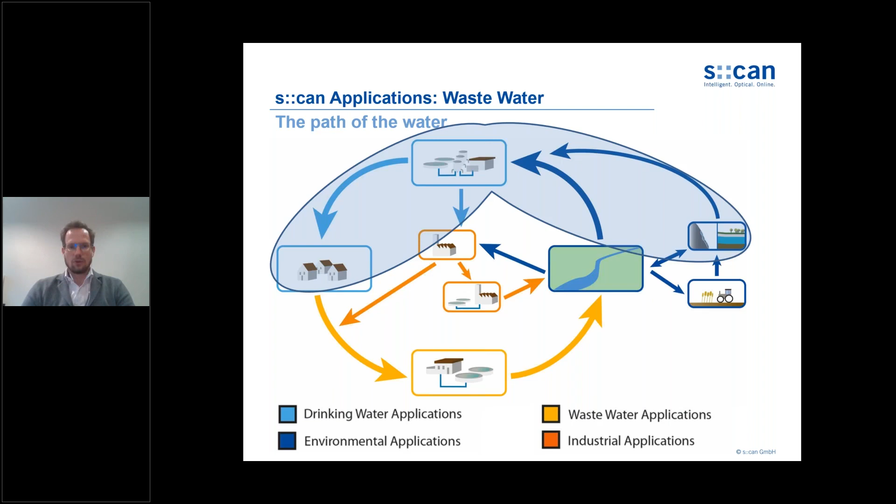I want to cover examples from raw water monitoring used for drinking water production itself, and then go into the distribution network. The applications I want to cover are not much about surface water monitoring, as this will be part of the environmental monitoring webinar. But bank filtration is a topic, groundwater monitoring is a topic, the operation control of the drinking water plant, and then number 5, distribution network monitoring.

The typical applications we cover for surface water monitoring are intake protection, combined with a contamination alarm that we can do with our systems, to make sure no contaminants reach the drinking water distribution plant that would be difficult to treat there.

Another application of surface water monitoring would be if you have different raw water sources available, for example a river and a groundwater source, and you blend these two water sources in your process to produce drinking water.

One very important part, which will also be part of the treatment plants, is feed-forward control. This is where you use data generated from the raw water to feed this information to the plant, and the plant knows in advance what's going to come in and can adjust the treatment process accordingly.

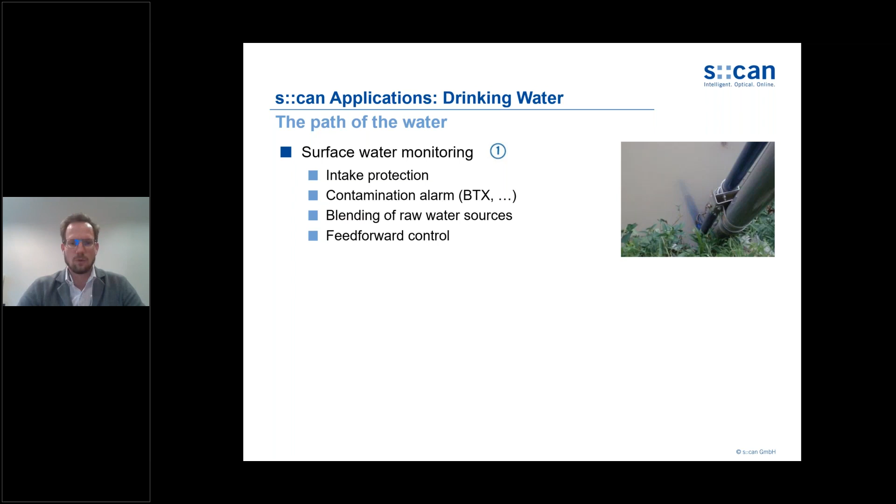Okay, bank filtration monitoring. Managed aquifer recharge is one topic, where you use water to top off the groundwater level, but very important is monitoring of filter efficiencies when talking about bank filtration. This is where you have monitoring wells close to the actual river bank, and the river pushes water into the groundwater, which is then taken for drinking water production.

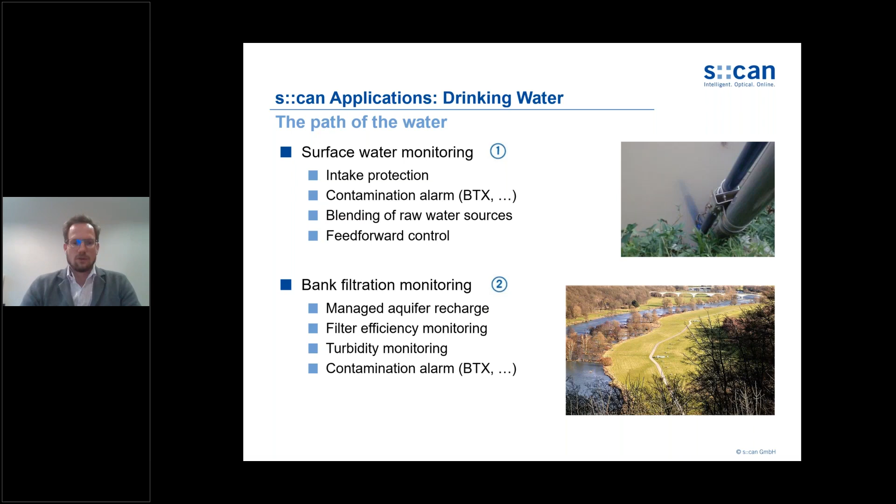Turbidity monitoring is important, for example if you have small flooding events, which we will see an example of later on. And obviously also contamination alarms. So if you have an accident with a ship on the river and this gets into the water, and then is pushed into the bank filtrate, this is also not optimal to get into a treatment plant.

For groundwater monitoring, the main application is nitrate monitoring. We have a limit of 50 milligrams per liter of nitrates in drinking water in Europe and most other countries, or even less. Nitrate is one of the most used fertilizers, together with ammonia and phosphate. If you have over-fertilization, the nitrate can find its way into the groundwater. The nasty thing about nitrate is that it's very hard to remove by a treatment process, it's very expensive. So the lower the concentration in the groundwater, the better.

Other parameters commonly monitored in groundwater are dissolved oxygen, conductivity, turbidity, and organics, like total organics or dissolved organic carbon.

In the operation of the plant, our sensors are used for coagulation control, which we already talked about. It's about turbidity in the first place, but then also organics and color that need to be removed, because we all expect clear and colorless drinking water, and everything that disturbs this has to be removed during the cleanup process in the drinking water works.

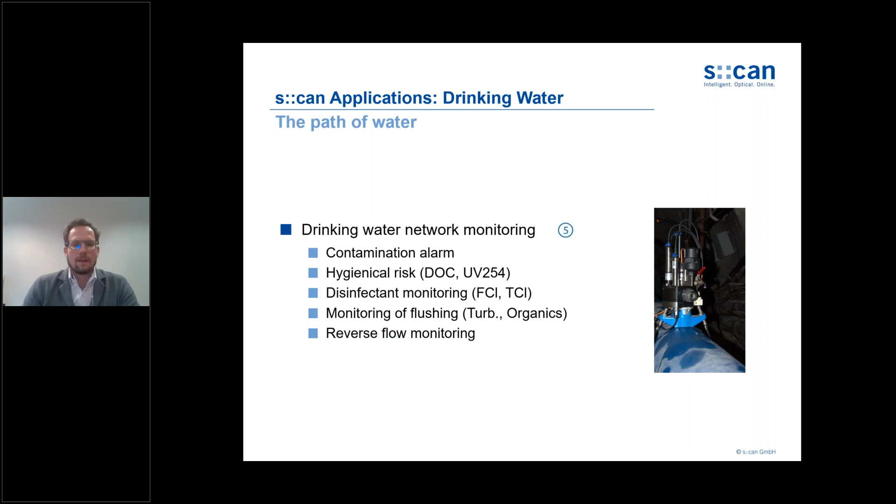We can also monitor the flushing of the network. When providers empty pipes for maintenance issues, they need to flush them with chlorinated water at high chlorine concentrations, and we can monitor this flushing, seeing turbidity and organics. We can also monitor water quality in reverse flow situations, for example when they use district metered areas, DMAs, and reverse the flow in one of these DMAs for leak detection and so on, and then we can monitor the quality of the water.

Before we jump into the applications directly, or the case studies, I want to spend a little bit of time on spectroscopy, not only because I'm a spectroscopist by education, but because it's key to what we do here at SCAN. So what we do is we use light to measure substances in water.

What we do is shine light through the water sample. The intensity before the light reaches the water is I0, the original intensity. As the light passes through the water sample, light gets absorbed. What we see at the end is reduced by the amount of energy absorbed by molecules dissolved in water. If you take this I divided by I0 and take the negative decadic logarithm, you end up with the absorption.

This is what we usually deal with here at SCAN. The beauty about absorption is that it scales linearly with the concentration of a molecule, via a natural constant epsilon that tells us how strongly each molecule absorbs light. The last factor is the open path length, or interaction length, that the light has with the water sample. The OPL is fixed by the spectrometer, so we have a linear scaling from the absorption to the concentration.

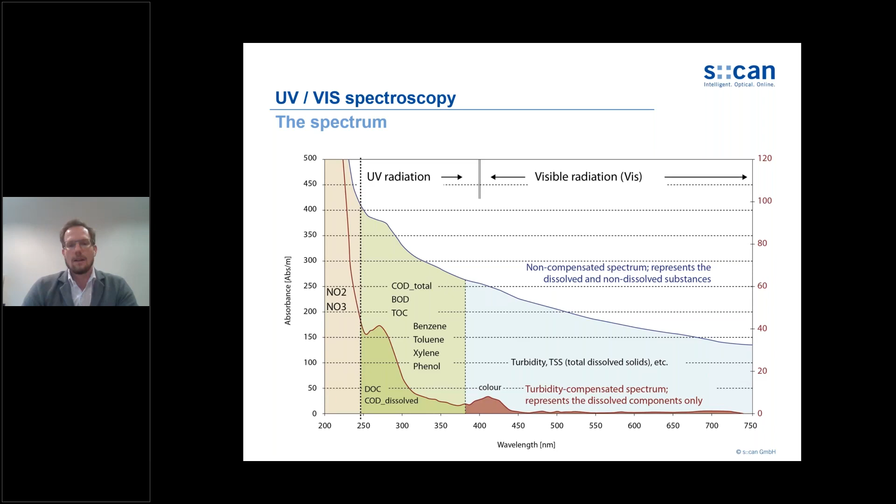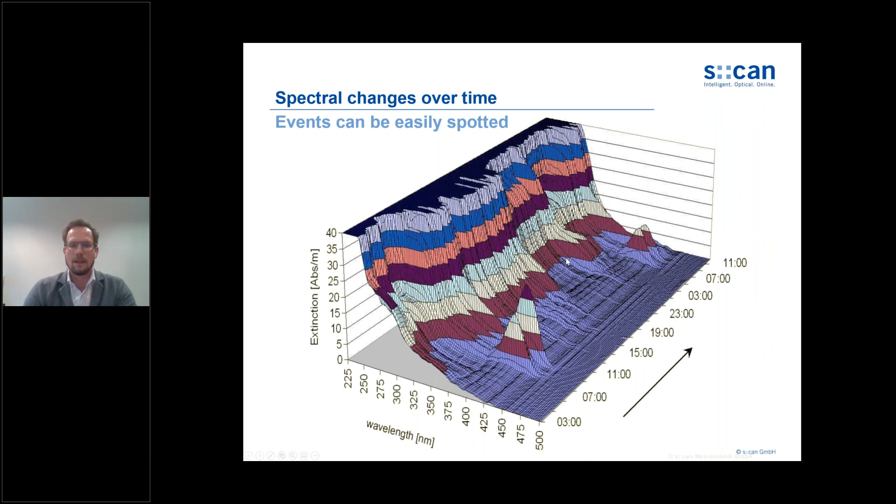And how do we measure this? We use our spectrometer probe to do so.

This has a xenon flash lamp sitting at the front that emits light over a broad spectral range, from the visible to the UV. This light passes through 2 beam paths, the measuring beam and the internal beam, and then the light is diffracted by a grating onto 256 pixels of a detector, giving us the wavelength information we need to calculate the absorption spectrum.

Before we run the measurement itself, we use this internal path to record the background spectrum I mentioned before, this I0. As soon as we've done this, we run it through the measurement beam and get the I value we need to calculate the absorption. This here is the open path length that we can influence. 35 millimeters, as you see here, is typically used for drinking water applications.

Environmental monitoring would use 5 millimeters, and wastewater applications usually 1 millimeter of absorption path length, because the higher the concentrations, the smaller we want to make the open path length to keep the absorption value approximately in the same range.

This is important for the calculations. And what do we do with the information that we generate with our sensors, not just with the spectro::lyser, but also with the other sensors like chlorine, conductivity, pH?

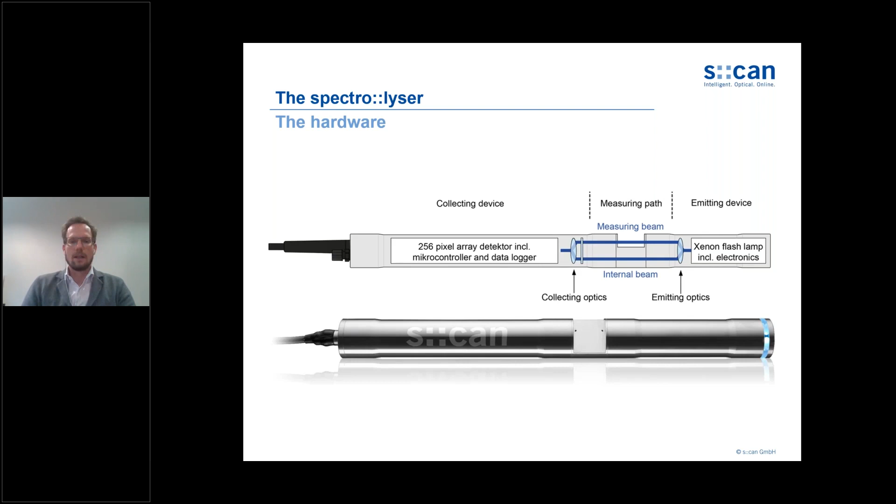There we look for abnormal patterns like increased noise levels, unexpected jumps in data points, and so on, to make sure that the data that we pass on to the event detection software after validation is clean from any outliers.

Because we don't want to detect outliers in these drinking water protection scenarios. And then we have this ana::tool that we use for event detection, and this can flag data points

as events, and this information is immediately fed back to the operators in charge that then evaluate this data and can also train these algorithms. This was a valid event, this was a false alarm, and so the system learns, and the cycle is kind of closed.

Now I want to talk a little bit more about this event detection because it's an integral part for the drinking water applications.

The ability to detect each of these contaminants is only limited by the precision of your detection principle, like GCMS or whatever. But if you want to do this online in real time, things look a bit different, and

this is because of all the other influences that come from the water source.

So we don't have only the contaminations, but we have particles that cause turbidity, we have a natural organic background, and in reality the line looks more like the green one that we see here.

And if you rotate this spectrum, you see the green UV254 values that we saw in the past slide. They are all within the normal fluctuation range of your water matrix.

And if you measure a data point like this blue one here, this is well within all the natural fluctuations, so you can't say: is this caused by a contamination, or is this simply the natural background?

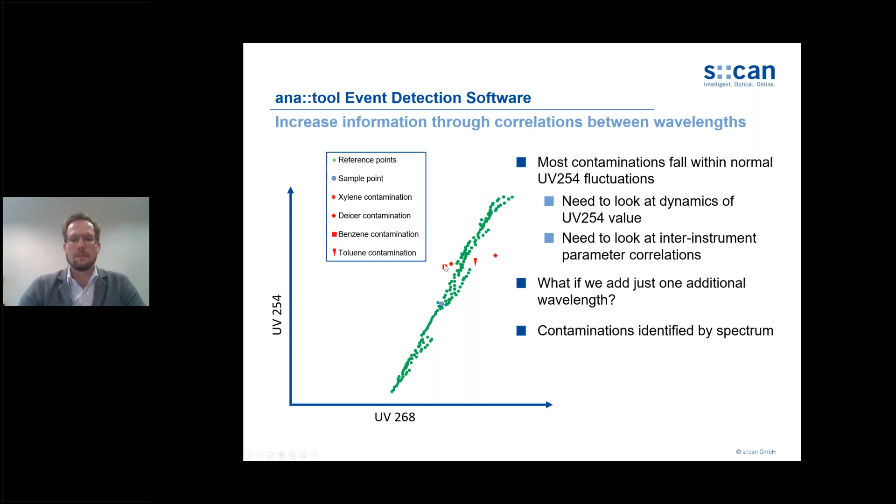Just adding a second wavelength to this picture clears everything up a little bit. You see that the contaminants start to separate from the natural fluctuations.

And now everyone would say, okay, the blue dot is well within the green natural fluctuation, and we look at a normal measurement here.

We can add more and more wavelengths to clear up this picture. With one wavelength, the alarm value is very low, 0.4. If we add a second one, we see the contaminants come out much clearer. If we use 5 wavelengths, toluene, for example, starts to come out of the noise, but the alarm value is still very low. And if we add a complete spectrum, like from the spectrolyser, then we can separate out all these contaminants very clearly.

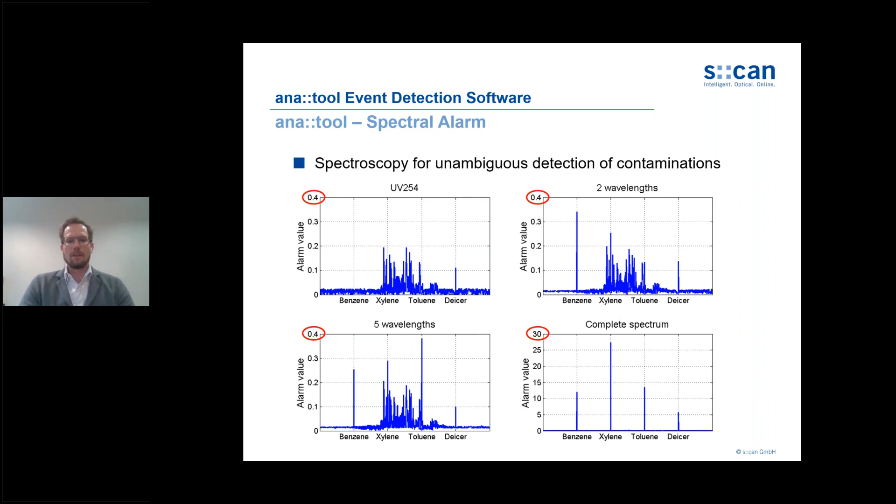And with that, enough from the theoretical background. I just wanted to cover the spectral data because we will see some information and some alarms, and I wanted to make you comfortable with the background of what you will see. And now let's jump into the case studies.

As mentioned, I will not show any case studies from surface water because this will be covered in the environmental section. But I will show you something about groundwater and bank filtrate in a second. And I want to start with our home supplier here in Vienna, the Vienna Waterworks.

Some background information: Vienna is very blessed with a lot of springs that are actually located quite far away from Vienna, in Lower Austria and in Styria. We have two spring water pipelines that transport this water to Vienna just by gravity, running down from the mountains. For the first Vienna water pipeline, which is 150 kilometers long, it takes the water about 24 hours to travel all the way towards Vienna. We have the second pipeline, 180 kilometers long, 36 hours it takes the water to reach Vienna.

But in summer times when demand is really high, we also have some bank filtrate that comes from the Danube Island or from the Lobau Natural Reserve. And last but not least, if it's really necessary, we have a well field located south of Vienna that can even supply 64 million liters of water per day. There are 3,000 kilometers of pipes, 29 gravity reservoirs just within Vienna that are filled with this water and then used to distribute it to the households, around 103,000 house connections at the moment.

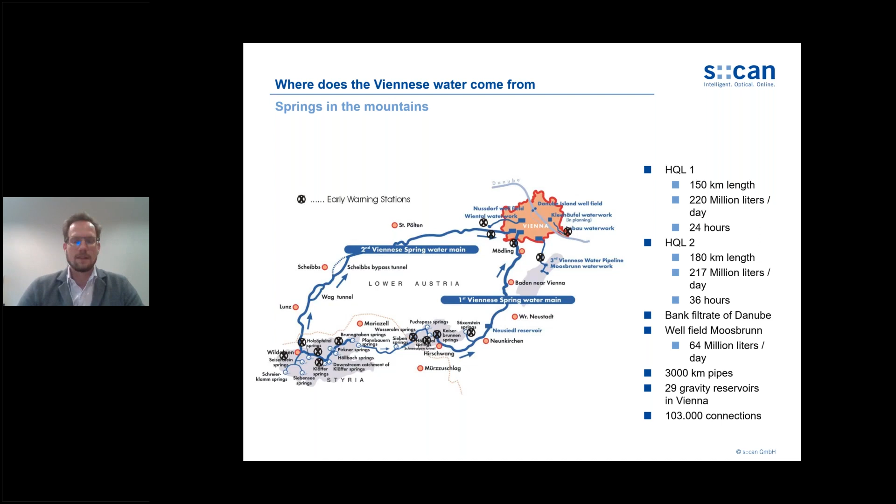And all these pipelines, all these wells, all this bank filtrate is monitored with s::can sensors. To give you some impression how this looks, this is the most prestigious spring we have. It's called the Kaiserbrunnen, named after the former Austrian emperor. You can't see our sensors, but they are located all the way down on this rod here, down in the water.

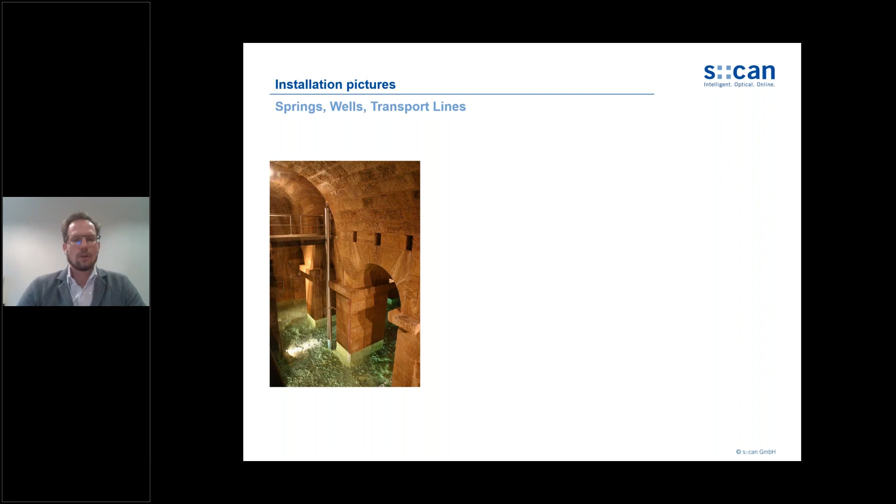Not all of them look that pretty. If you look at the bank filtrate monitoring station at the Danube, it looks more like a lab. The spectrometer sits down here in the flow cell, and we have a conductivity sensor feeding into one of the terminals.

Another example from one of the springs in Styria: this is actually a submerged installation that was taken out for maintenance. You see the spectrometer here. Usually it would go all the way down into the water on this rail. And last but not least, all the reservoirs in Vienna are also equipped with a spectrometer and at least a conductivity sensor.

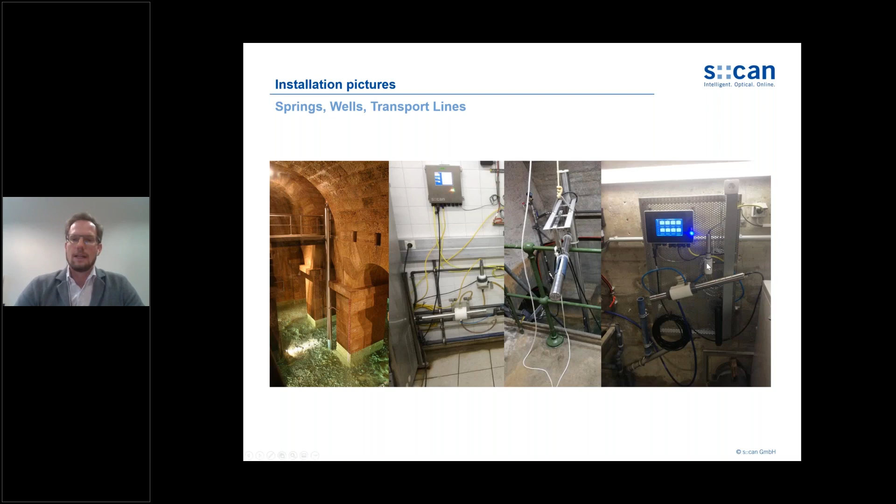And now some data. In total, it's over 70 stations, and everything is monitored with one or the other type of s::can sensors. All of them are equipped with a spectrolyzer.

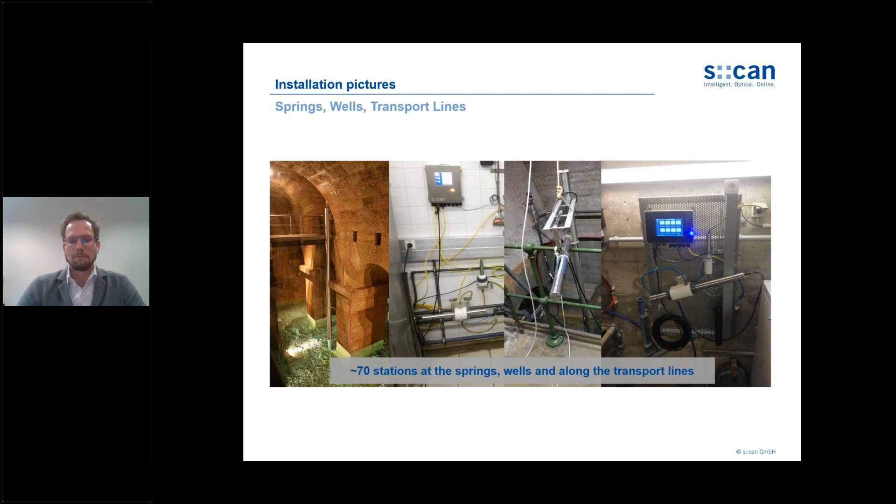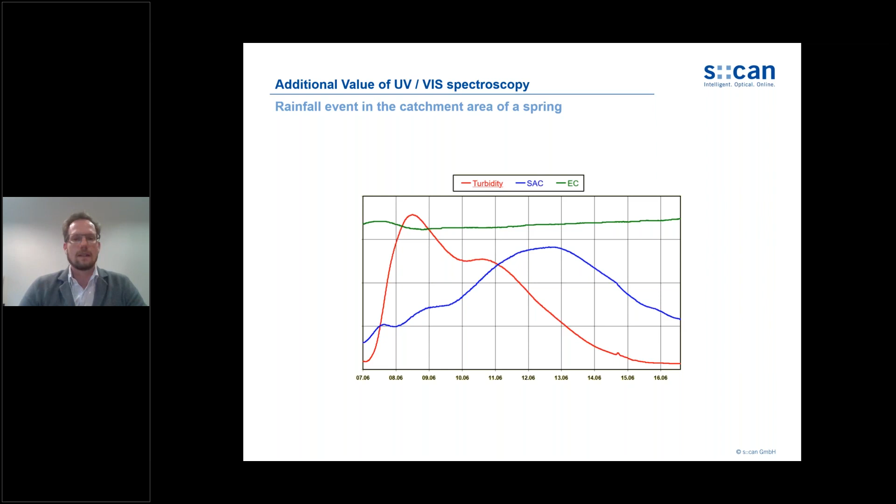What we do, because we have so much water in Vienna, is simply monitor the quality, and if it's not good enough, we just discard the water. If you would discard the water just by looking at turbidity, you would feed a lot of organic matter into the raw water pipelines. This is avoided by monitoring the water not just with classical sensor systems, but also with a spectrometer.

Another example from one of the springs in Styria, you can see there.

Actually, you can see 3 events here. The first one, maybe not that prominent, was only picked up by conductivity, so it's not seen in turbidity or organics. The second one was only picked up by the turbidity sensor. And the third one, the most prominent, was obviously causing a major disturbance in conductivity, but also in dissolved organic carbon. Only very short peaks in turbidity, and then turbidity would be back at normal levels, but not the organics. So this is to illustrate that it's really important to combine different sensors with thresholds, with pattern alarms, to be sure to catch all events.

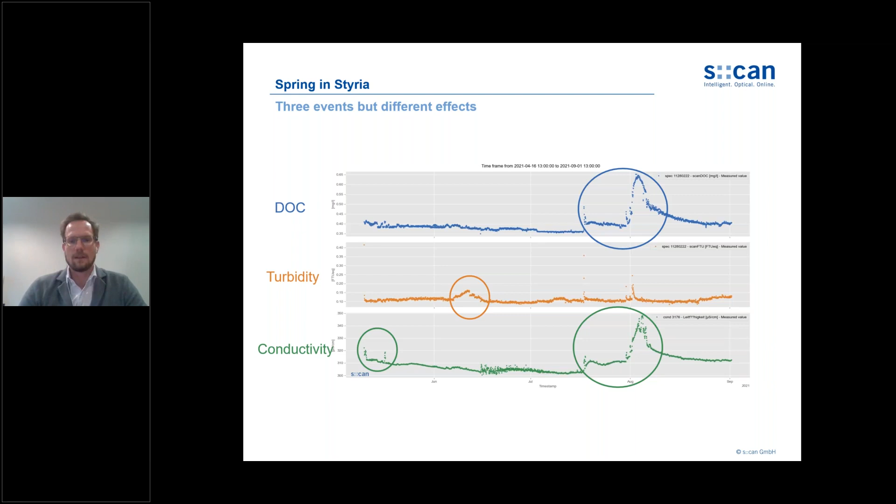And now enough from springs, let's jump into a bank filtrate example from the Danube River. We have 4 different bank filtration wells that feed into the same gathering station, and the main line that gets into the works is monitored with one of our pipe scans.

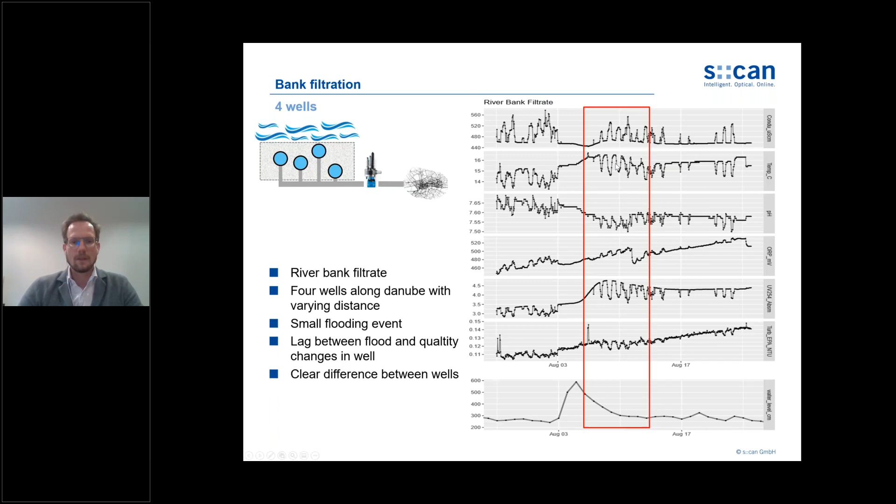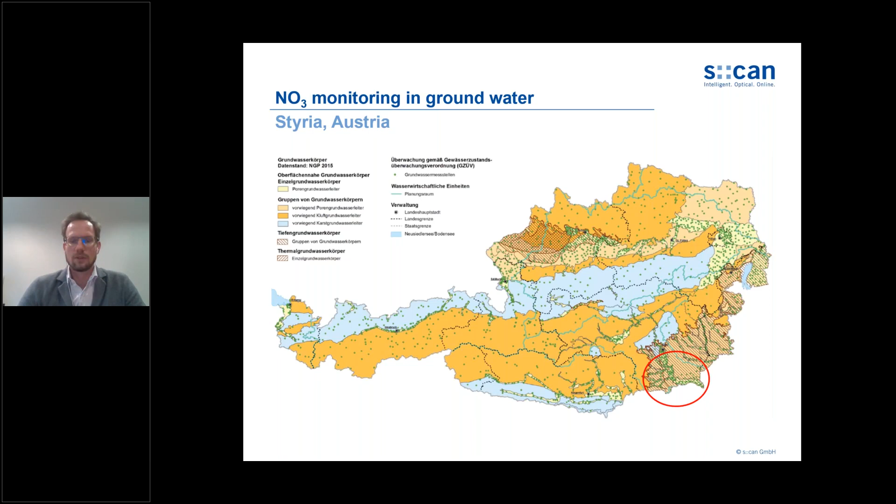So next example, groundwater monitoring. We have a very intensive nitrate monitoring in Vienna, in Austria. You see the map of Austria here, and each of these green dots is one groundwater monitoring station. s::can has a lot of sensors located down there in the southern part of Styria, very close to the border to Slovenia. For many years, we monitor the nitrate levels there that are quite high for Austrian means. I want to show you some examples.

The sensors that are used there look like this picture on the right. At the very bottom, you have a conductivity sensor, a condu::lyser. In the middle, a dissolved oxygen sensor. And on top, that's the spectrometer sensor with the cleaning brush sitting here.

Our research partner that runs these measurement locations did a very intensive monitoring, or comparison, between what our sensor reads and what the lab method actually gets, and this is what you see. Up there in this graph you see the nitrate level for one of these wells that was around 32 milligrams per liter, and then at the end of November it started to rise to like 33.5, and then it went back down again.

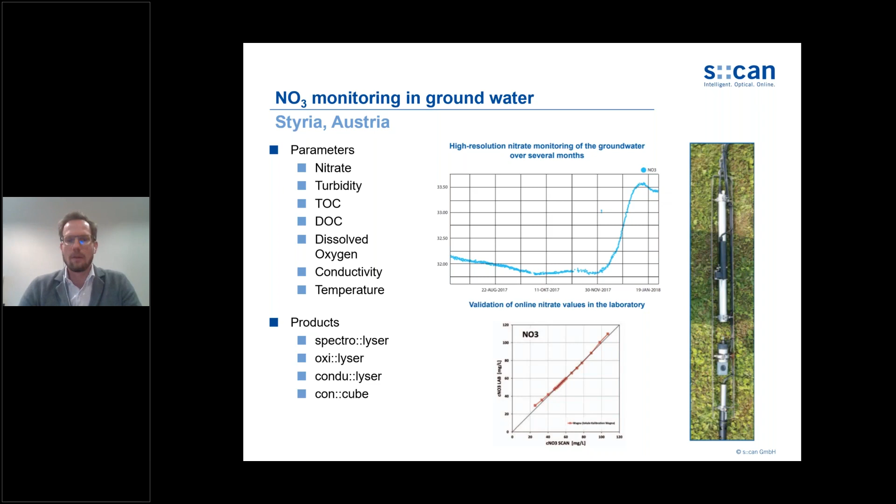And just a reminder, 50 milligrams per liter is the threshold in Europe. What the drinking water providers in this region do is monitor the groundwater in special wells upstream of the actual production wells that they use for drinking water production. And they have models in the background that allow them to know where they need to pump out the groundwater so that the groundwater flows start mixing in a certain way, so that the nitrate concentrations that get into the production facilities are always below the threshold of 50 milligrams per liter.

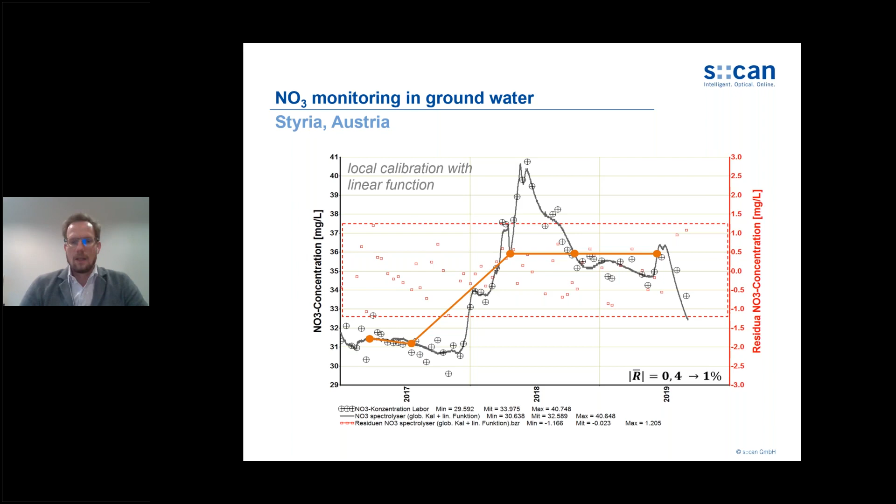So with that, we change to the second step in the drinking water production, the operational control in the drinking water plant. I picked one story from a plant in Denmark, and you see the operational schematic up there.

Raw water comes into the plant and is split into two streams. Coagulants and flocculants are added in the flocculation system, turbidity is removed, then there's pH control by adding sodium hydroxide. Each stream is split again into two, and there's an ozonation treatment step.

Then there's something very interesting: a biological filter, where bacterial cells consume the organic matter in the water. After that, there's a granulated activated charcoal filter. Then the whole water gets disinfected by UV lights, to make 100% sure no bacterial cells get into the drinking water network. Then there's a chlorination step, a buffer tank, and after that the streams are combined and a final quality control step is done before it goes into the network.

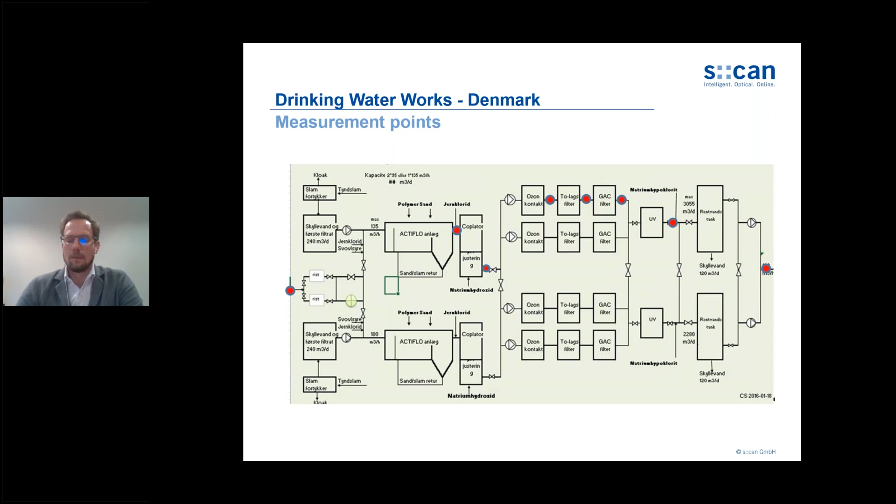We did a survey on this plant, and every red dot here was a location where we took spectra to evaluate the performance of this plant. I want to show you some data right now.

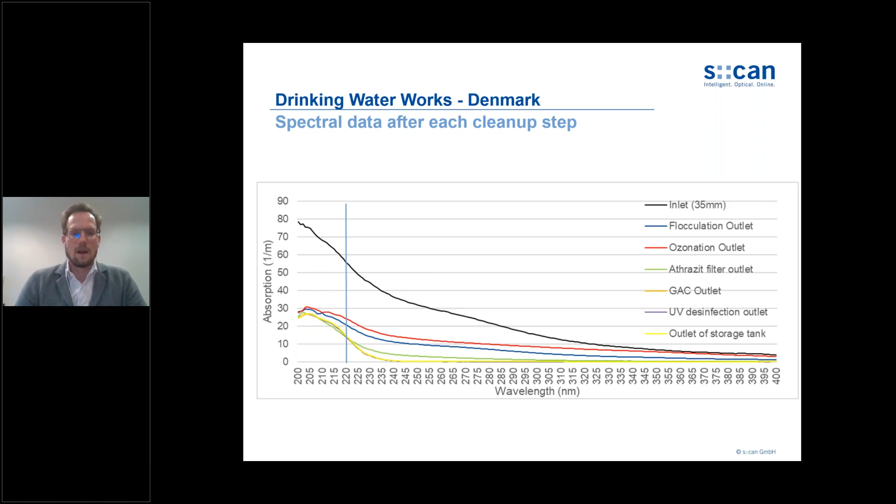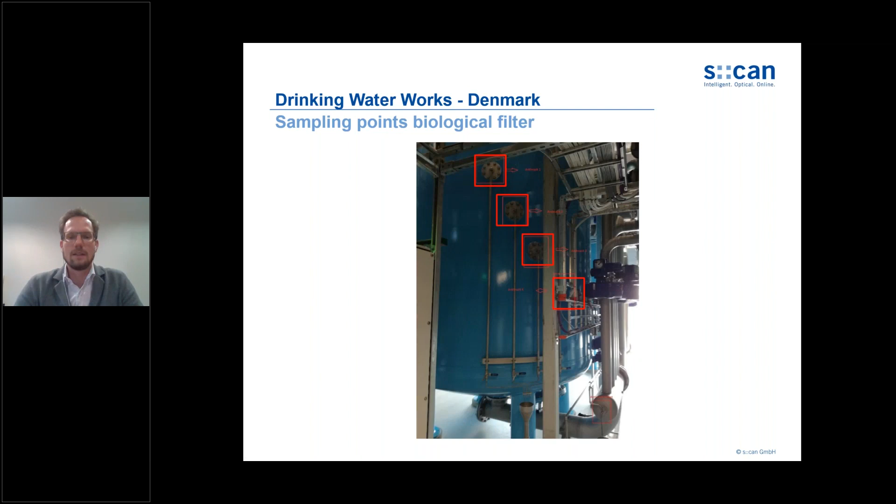But the operators of the plant wanted to know even more about how their process works and how well it works, so we did more extensive field work with them. This biological filter actually has 4 sample ports. The water comes in from the top and flows out at the bottom, and you have these 4 layers where the biological system is eating and consuming the organics.

Looking at the samples from these different ports: after ozonation, which is the feed into the biological filter, and after the first layer, you still see quite some upward shift and absorption in the organics. But after the second filtration step, we're basically done consuming the organics. So the third and fourth layers are basically not used at this point, and the outlet quality doesn't change anymore.

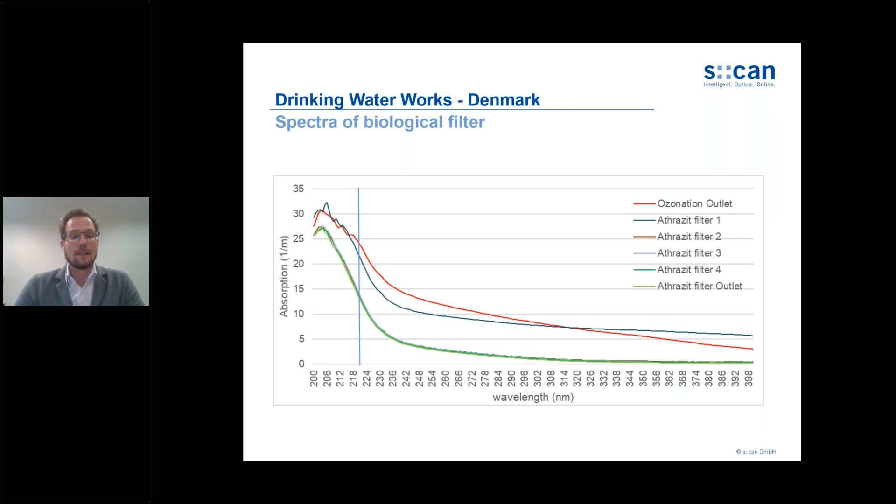In the end, what they learned from this is how to better operate their filters. They stopped flushing the filters as frequently, because they saw that it takes much longer to actually fill them, and so on.

It was not clear if this is coming from the natural background of the water source, or if this has something to do with the measurement itself.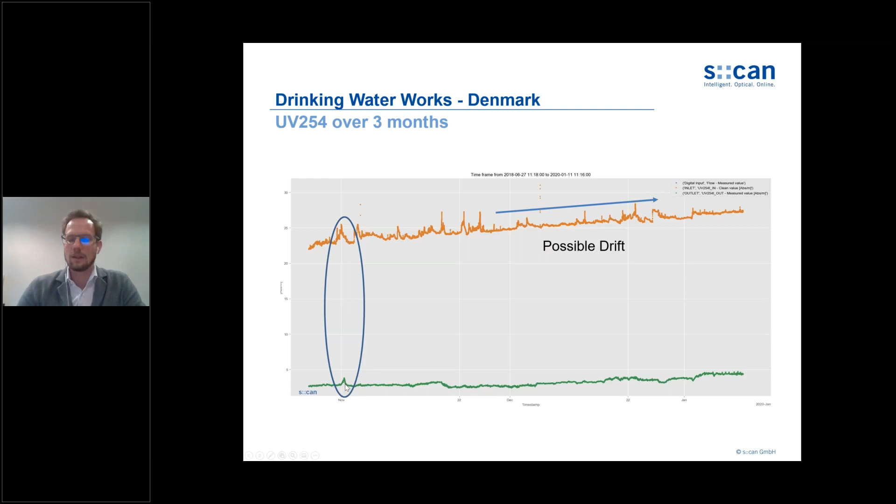But the more interesting part is this part here. There was one event at the very beginning where the UV254 at the inlet went up, and it also went up at the outlet. Luckily, they were also using our alarm system, and this is exactly what it showed. It immediately picked up this unexpected rise at the outlet and flagged it as an alarm for the operators, who could immediately react.

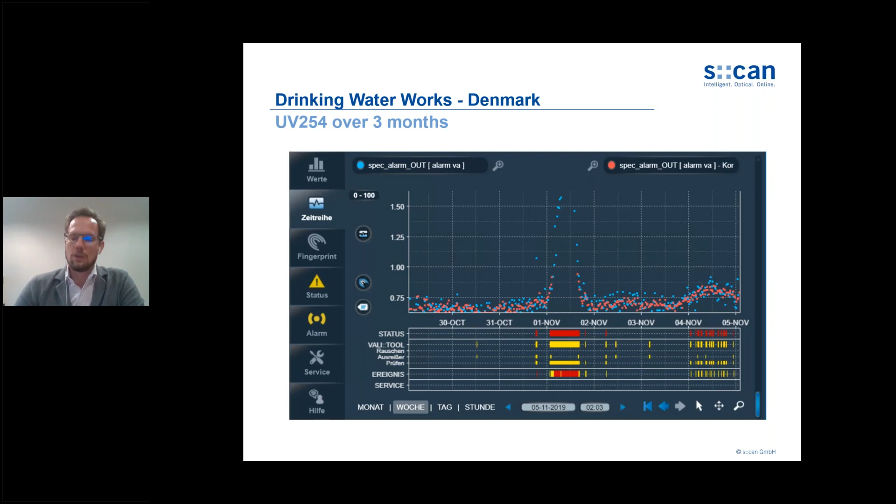And with that, I want to go a little bit deeper into this predictive control I was mentioning at the very beginning, to show you how much saving you can actually get from using a system like that.

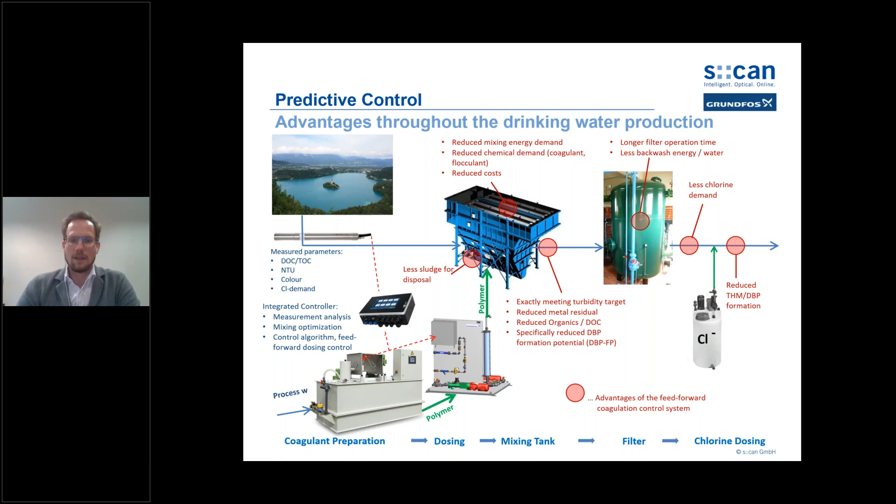And with that, I'm done with the drinking water works. Now let's go into the distribution network. We have seen part of this already if you watched our Pipescan webinar.

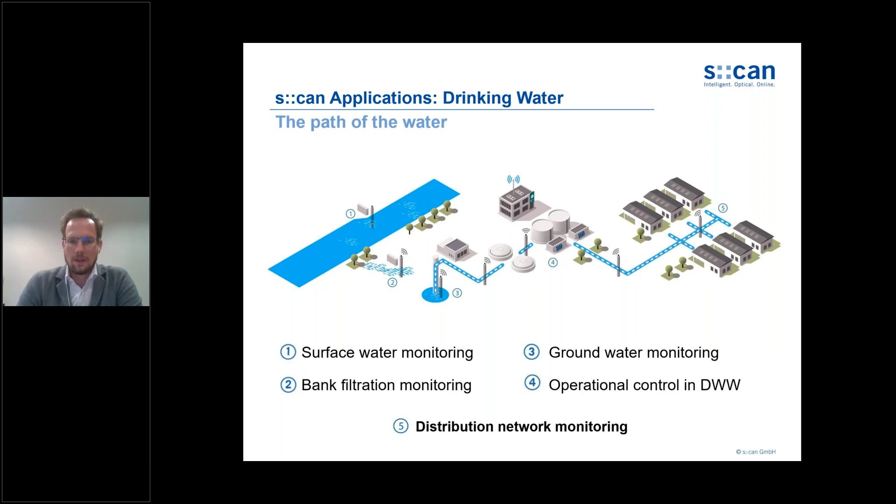But let's start with two examples from the United States, if the slides move. Vicky, can you move, please? Yes, okay, of course. So drinking water security and all, they move quickly, quicker than expected.

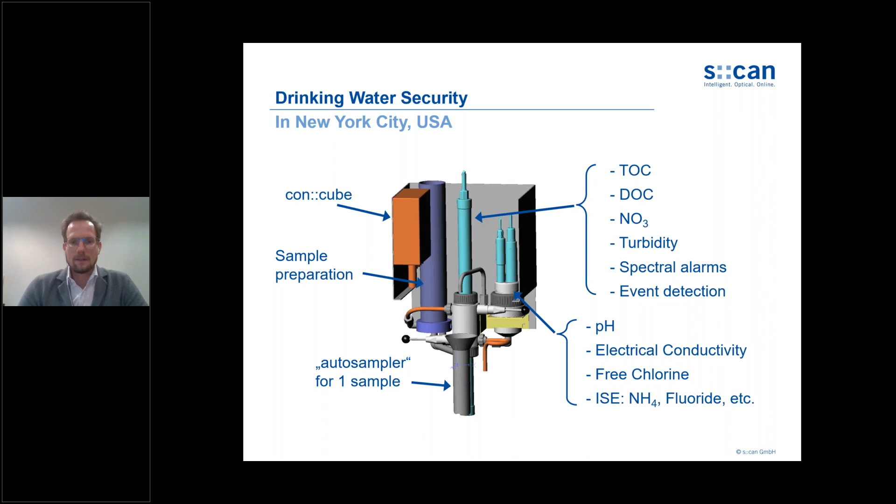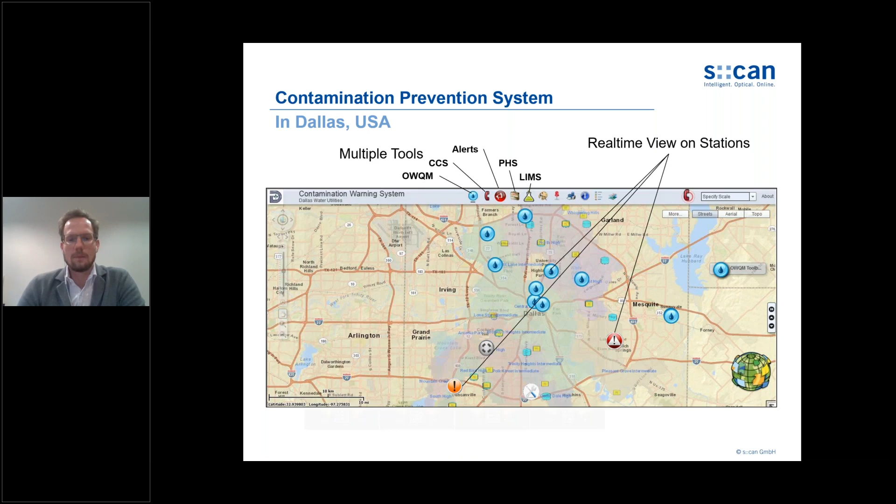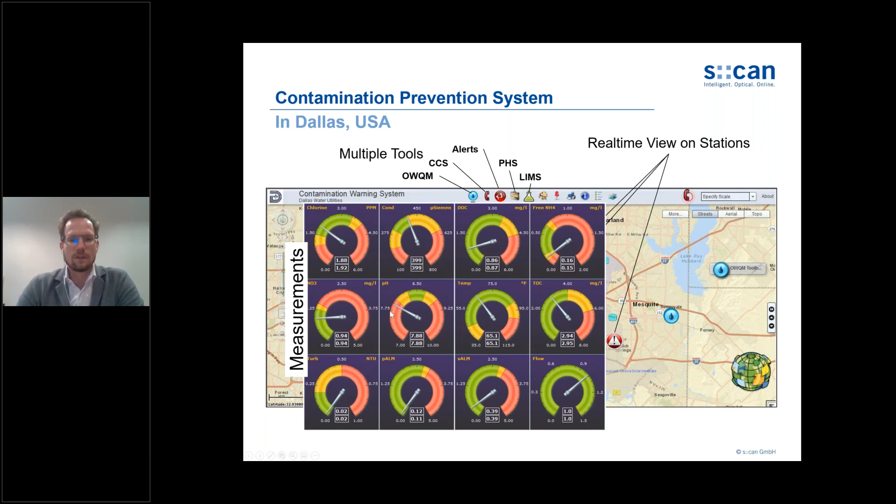In this case, pH would be too low, for example. And if they further click on one of these parameters, they can also see the view over time, where they see how the pH was behaving over the last couple of days and hours.

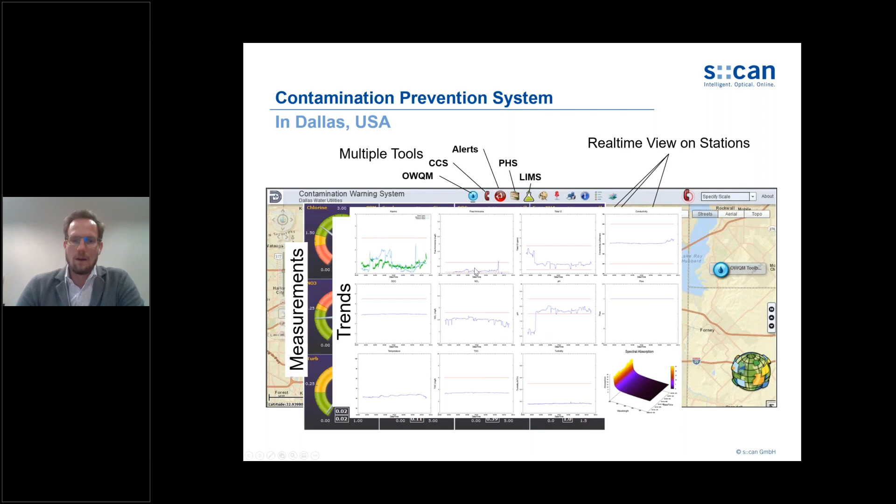And now, very quickly about some pipescan applications. The pipescan is our monitoring system that sits right on the pipe, monitoring various parameters like turbidity, UV 254, color, DOC, but also the classics like conductivity, chlorine, directly under mains pipe pressure.

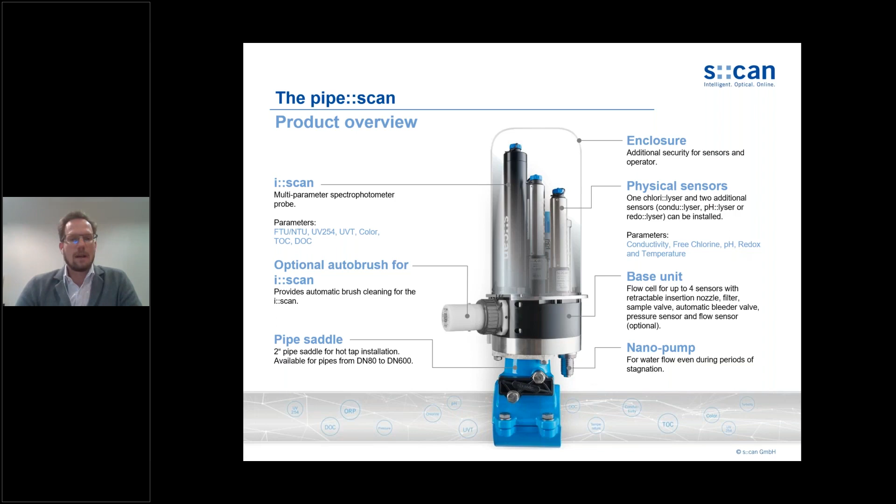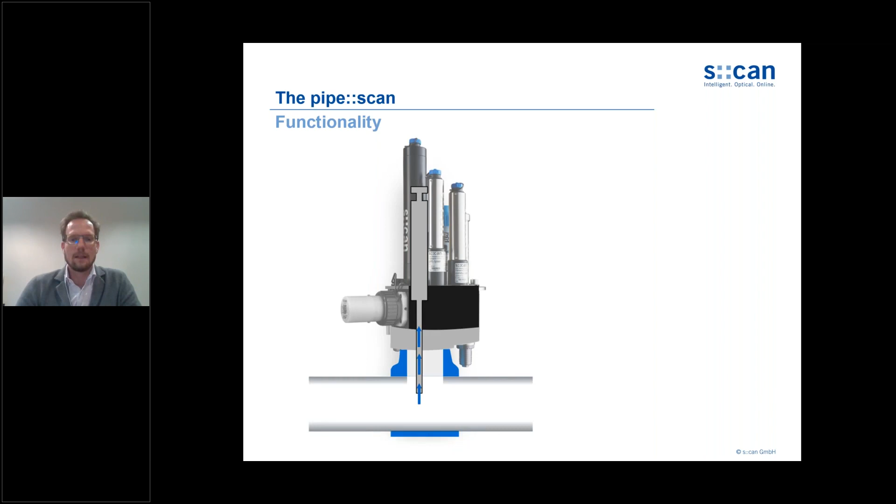And how do we do that? We have a straw that reaches into the pipe, that draws in the sample into the analyzer, the pipe scan. This water passes through a filter, and then it's circulated through the flow cell over each of the sensors by a nano pump, and after it passed each sensor, it's re-injected into the pipeline.

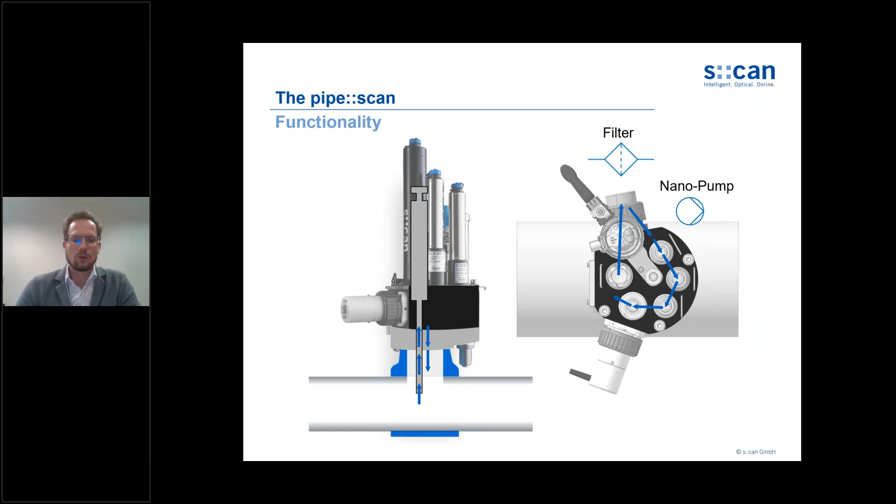And with that, we do not have any non-revenue water, because water utilities today are optimizing the network for losses as much as they can. So we didn't want to bring another loss of water by adding more and more online monitoring stations.

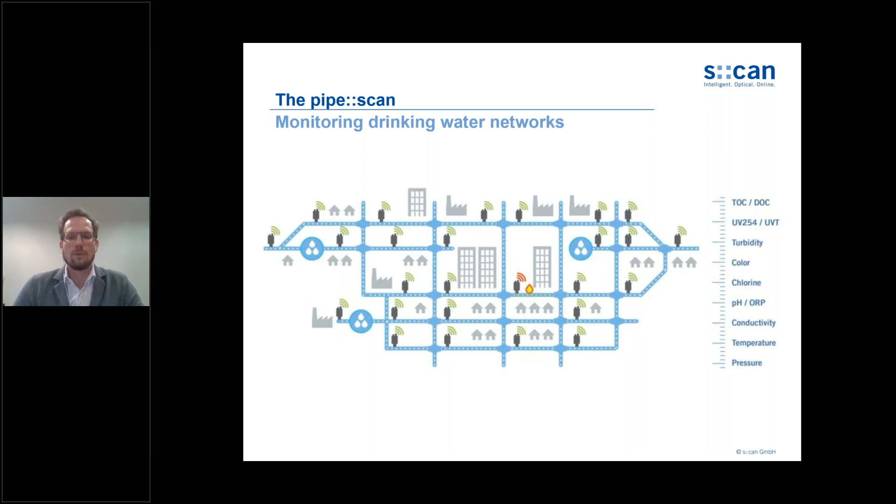And this is how we imagine this will look in the future: pipe scans or other monitoring systems spread throughout the network. Remember, the European Water Directive says source to tap, so they need to make sure that the water quality is right all the time.

Installations would look like this, with different types of power supplies. In this case there's a turbine, but there's also the chance to work with solar panels, or you have main power supply available at the pumping station, for example.

And we are working on making the pipe scan run from batteries, so that the installation gets even easier.

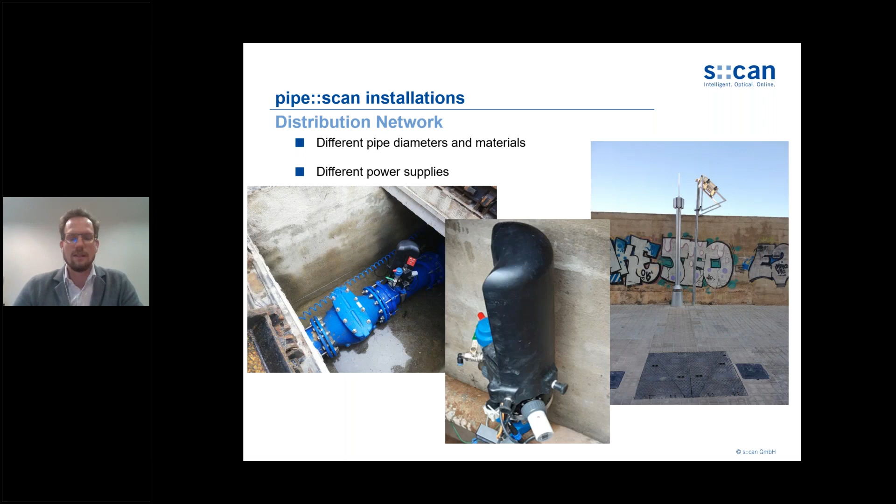And now let's look at some data that we generated with the pipe scan. So we have a European city there, a couple of 3 months of data. You see nice fluctuations in pressure: at night they drop the pressure because there's less demand, and during the day they move it up, they increase the pressure.

What you also see is that temperature slowly rises over summertime. We start with around 12, 15 degrees Celsius, and end up with around 25 degrees Celsius. Remember, the higher the temperatures, the more likely bacterial regrowth is. And everything would not be that dramatic if chlorination would work all the time.

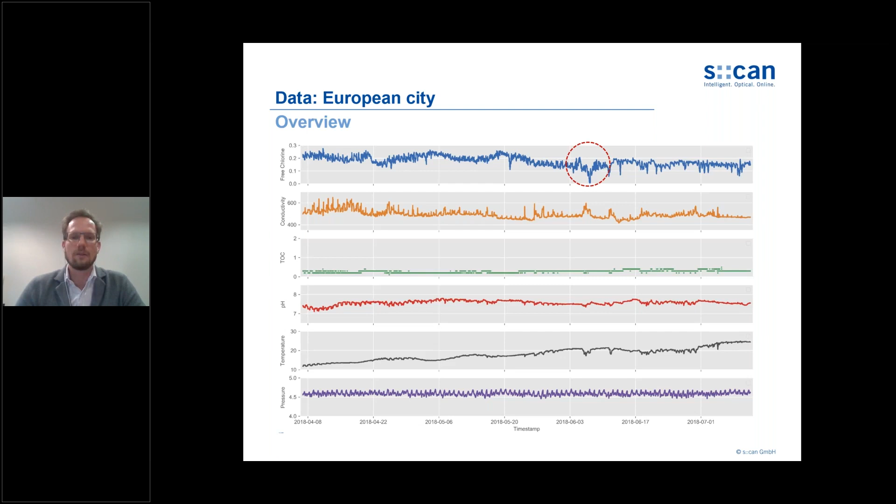But if you look at this one tiny drop here and zoom in, we see that in this example there was actually a time period of 3 hours where there was no disinfectant present at that spot, which is of course not ideal. And if we would just sample with grab samples manually twice a year, the probability to catch exactly these 3 hours of disinfection loss would be just 0.07%.

And if we took one sample every week, we would still be at just 1.8% probability to catch it. In the end, it's like comparing taking photos of your house versus video surveillance if you want to catch someone breaking in.

And this information can of course then be fed back into a digital twin, for example, to fine-tune the algorithms.

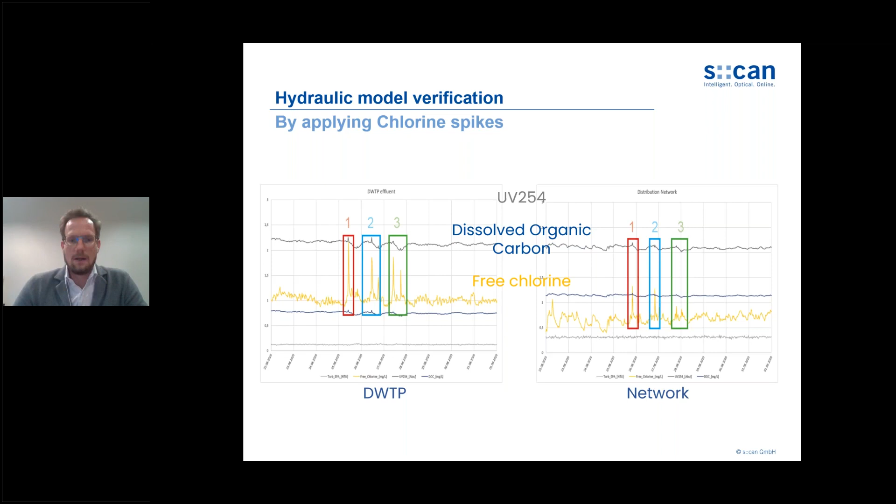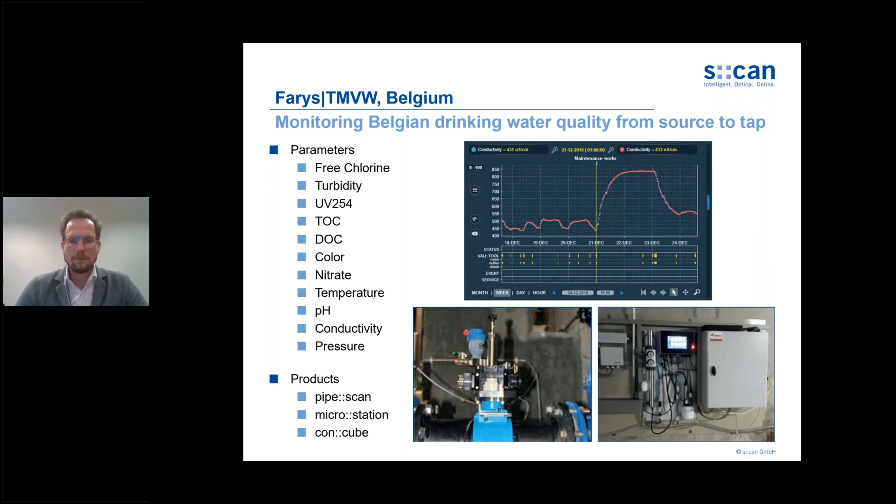But what is even more impressive is what happened when they had a major break of one of the pipelines. In Sint-Pieters-Leeuw, the main drinking water pipeline burst, and they had to change the flows to be able to supply all citizens with water.

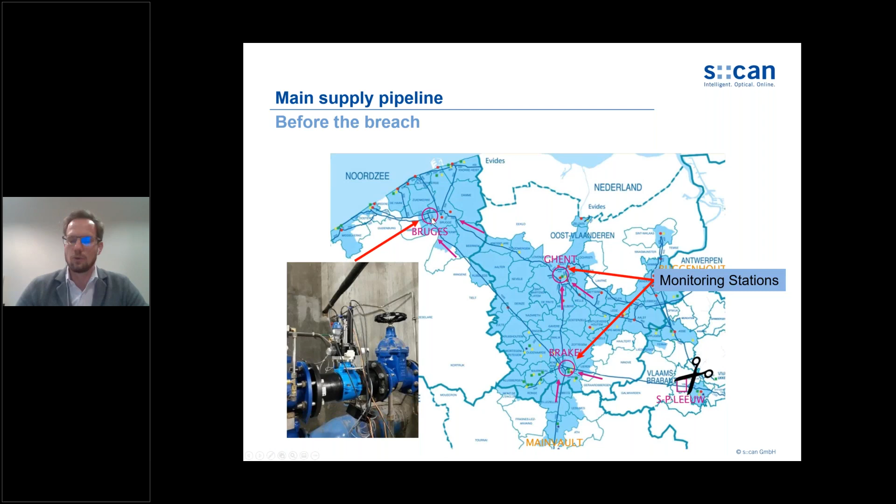Usually, most water comes from the main vault from Sint-Pieters-Leeuw to Brakel, and goes on to Bruges, the same via Ghent towards Bruges. With this major pipeline break, they decided to shut the network at this orange marking, and you see that a lot of flows changed.

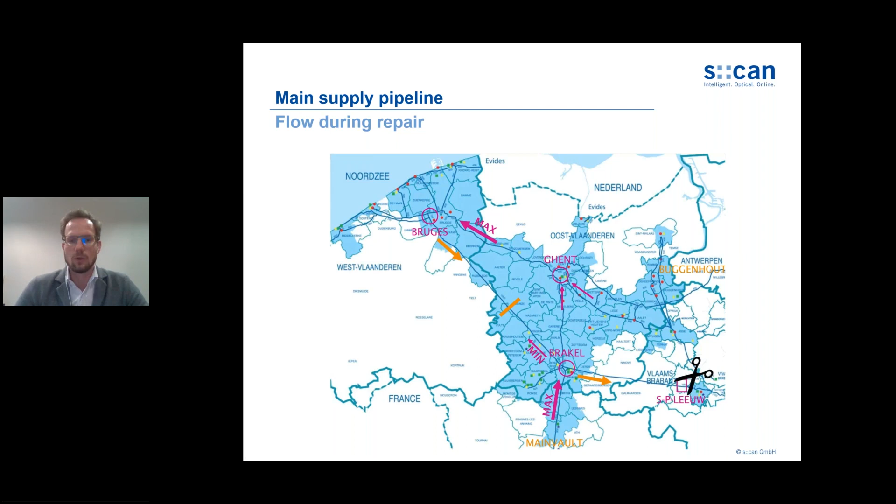So they had to supply the maximum available water from the main vault to Brakel, and the same is true from Ghent to Bruges. They reversed the flow here, shown by the orange arrows, to be able to supply every citizen with drinking water, and they could monitor all these changes throughout the network.

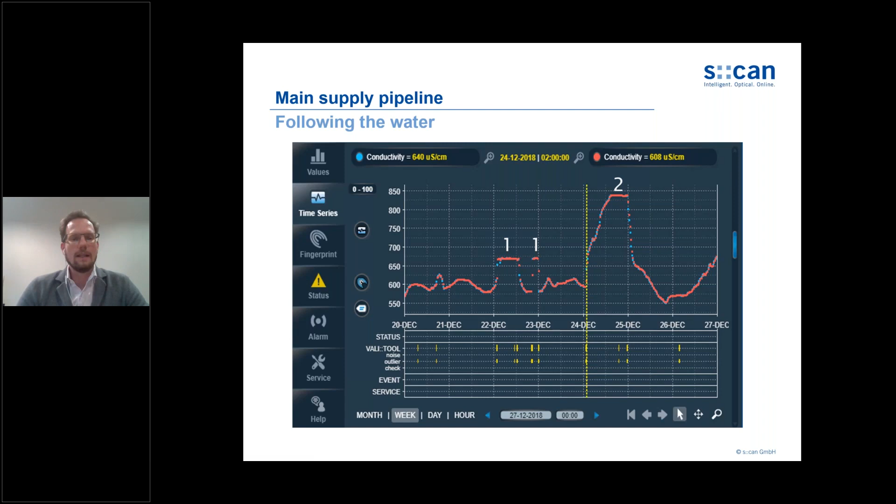In this case, I'm showing you conductivity. In these changes marked as 1, this is where they use the backup source, a backup reservoir, to feed into the network. And in the area marked with 2, they saw that water was stagnating in the pipelines. So they got a lot of operational insights on the network that helped them optimize what was going on.

If you look at what this number actually means, a SUVA value between 2 and 4 means there's a medium risk of disinfection byproducts forming, and if the value goes beyond 4, you have a high risk of this formation. And what was interesting for them is that they could pinpoint customer complaints coming in through email, chat, or telephone calls to this change in the SUVA value.

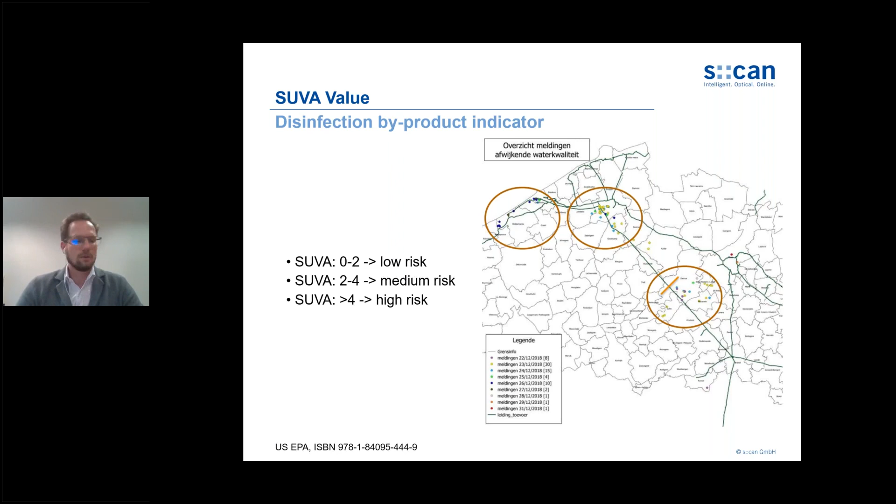People called and said, okay, my water smells differently, my water tastes differently. And they were able to pinpoint this to explain the customer complaints.